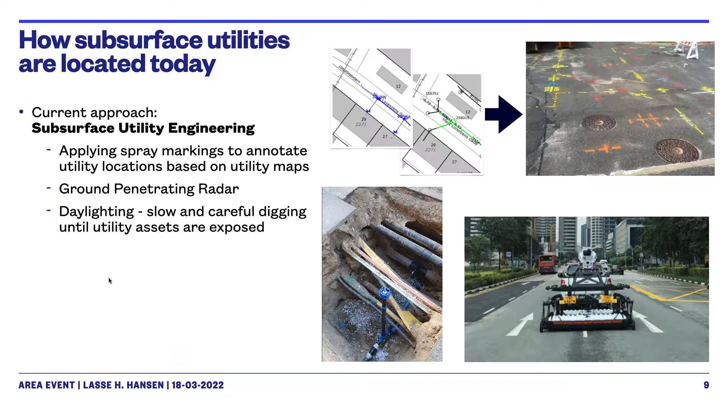So part of the title, Subsurface Utility Engineering, is the surrounding topic of what we're talking about today, because that's actually a profession and a task that engineers have to do in the field. And what is it really? It is how we nowadays locate subsurface utilities. In traditional ways, it's either by looking at utility maps and then applying that on the streets with utility markings, or you take more advanced equipment like ground penetrating radar scans, or if you can't find the utilities, you simply have to do what's called daylighting, so slow and careful digging until the utility assets are exposed to daylight.

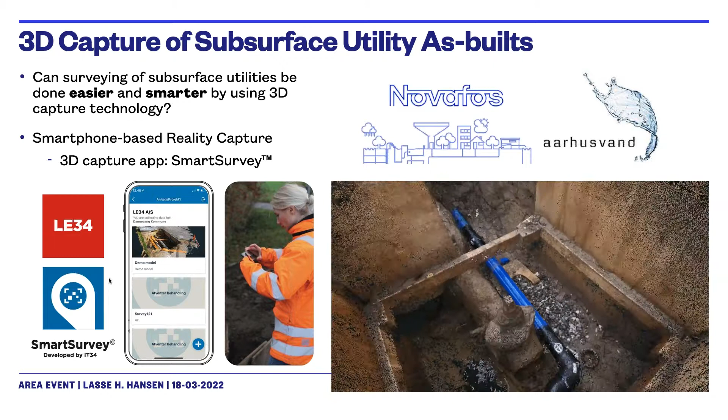And just to give you an idea of what Rasmus was supposed to tell you about, the 3D capture part of subsurface utilities. This is where we asked ourselves, could surveying of subsurface utilities be done easier and smarter by using 3D capture technology? And what LE34 ended up doing was build a smartphone-based reality capture app that uses photogrammetry to make really nice and detailed 3D point clouds of as-built utilities.

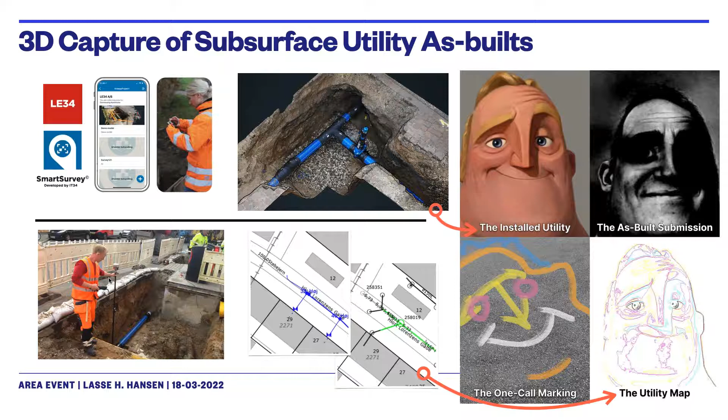So when you compare that to the Mr. Incredible meme again, we could say that the 3D captured as-builts are actually now the installed utilities. They are like an exact 3D representation of him, whereas in the traditional way, what really happens is that this utility installation, and we're living in a 3D world, right, gets compromised into this utility map.

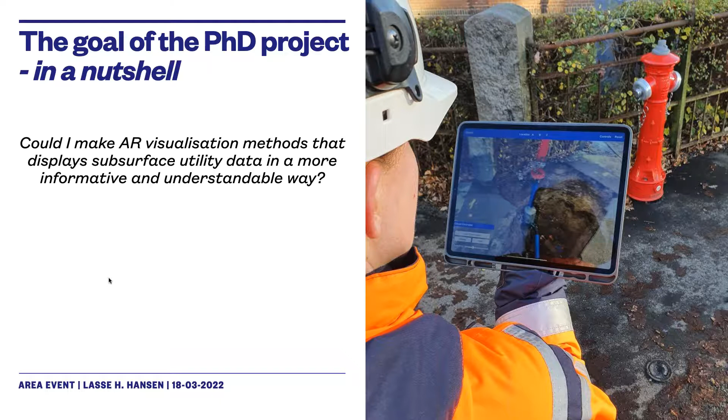Okay, so what I wanted to explore further in my PhD, especially the visualization part, was whether I could make new kinds of visualization methods that could display subsurface utility data in a more informative and understandable way. To understand that, let me introduce some of the challenges with visualizing underground infrastructure.

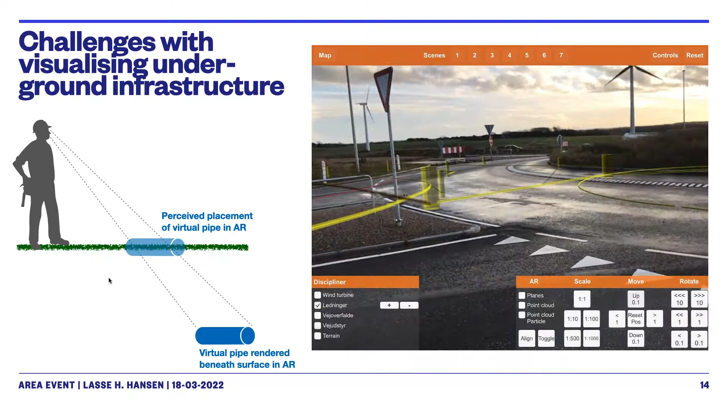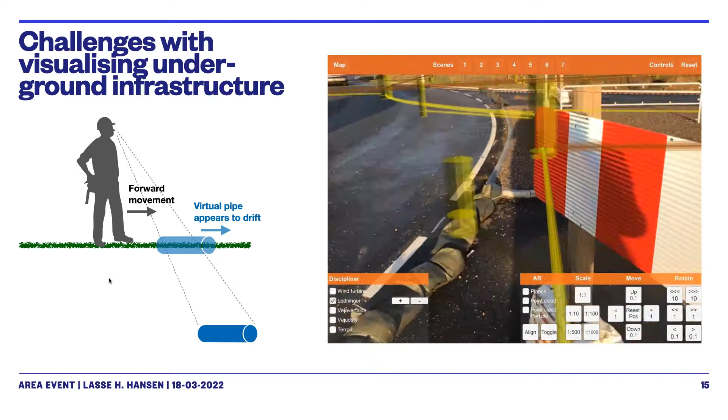One of them is that, as you can see here in the video, if you just naively display subsurface utility data as 3D models beneath the ground, even though these are correctly placed, it doesn't really seem right. It looks like these 3D models are somehow floating above the ground, and it has to do with what's called the parallax effect, when you try to visualize something behind an opaque surface, and this becomes even worse when you're moving, where the parallax effect really becomes present.

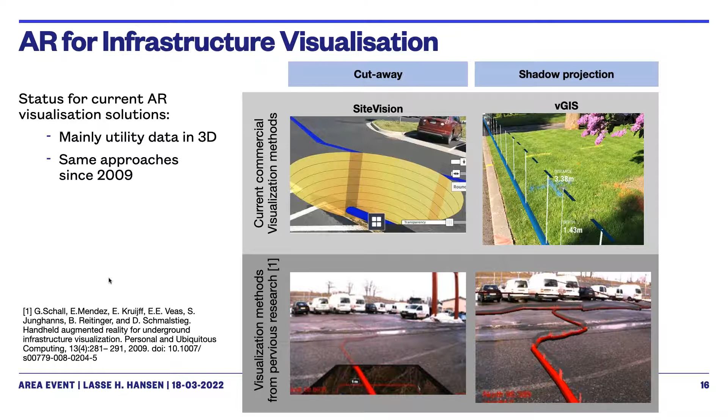But when you look at it really, you can see that these visualization approaches were the same as what has been done back in 2009. So there hasn't really been anything new, I would say. That's at least what I found one of the motivations to try to look into: could we maybe do another kind of AR visualization? And also one of the big problems is that most AR systems today just use a planar ground surface estimation. So a lot of times these techniques don't really follow the actual terrain of the real scene, because they just estimate it as a planar surface.

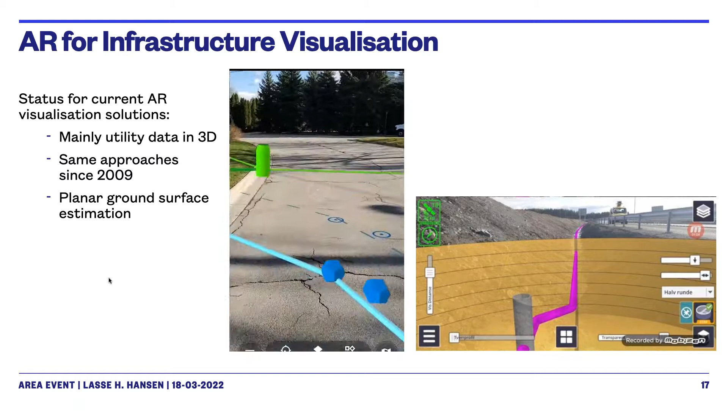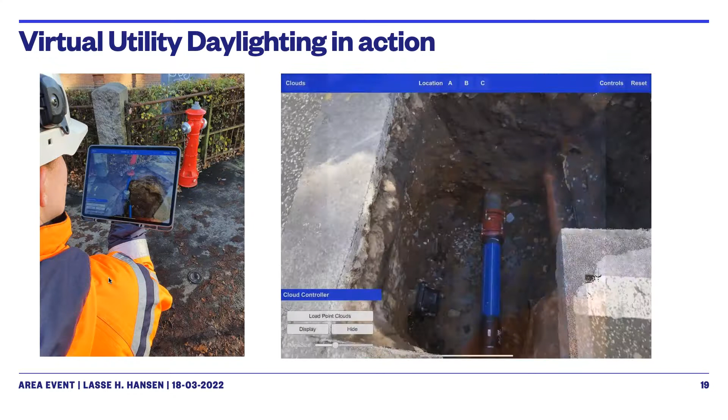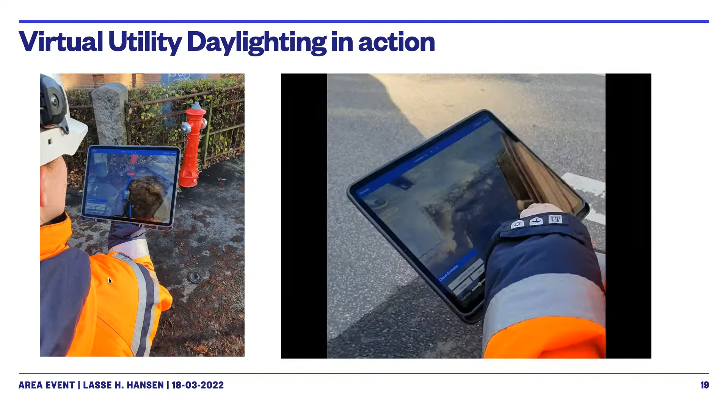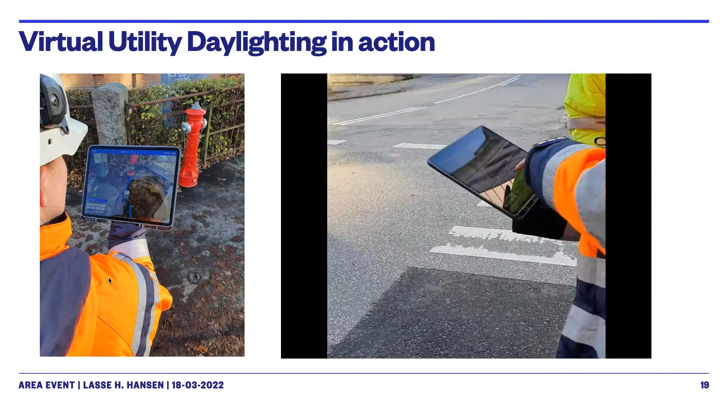So here you can see we place the 3D point cloud on top of the street surface, and it's actually kind of like a time machine, right? So what we look at here is, 6 months ago there was the excavation, but now we can visualize how it looked. And this is just another example of it, but it really provides a believable AR experience. And I would say that this is also due to the fact that we actually have something that was captured in this place, and then we perfectly align it again in the same place. So it kind of fits into the real world, right?

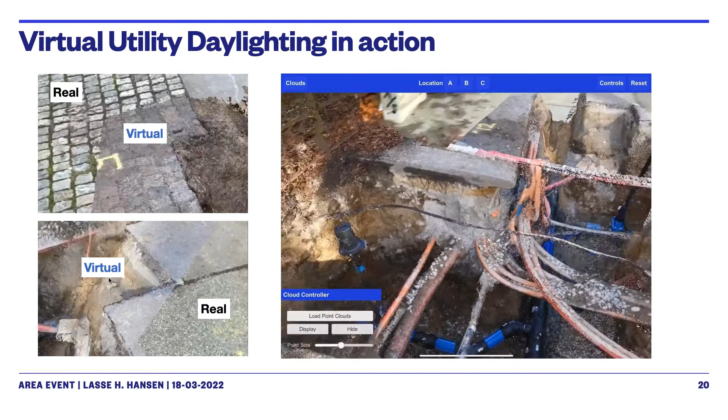And we also interviewed some of the professionals working with this, mostly excavators and utility planners in the field. And they really liked it. Some of the pros were that it provided a clear picture of what is beneath the ground, and the possibility to see the utilities' placements and the depth, and especially depth is very important, because most of the time in utility maps, depth is lacking. The width and material type, all these kinds of things, they could just read from this realistic-looking point cloud, and it basically unlocks the dream of x-ray vision before digging.

The cons, of course, were that you need to capture the point cloud data beforehand, otherwise you can't display anything, right? So that's kind of a big limitation in terms of using this everywhere. And some also mentioned that it could actually provide a false picture scenario. So for instance, if another excavator happens to have been excavating after the 3D capture documentation happened, then what is shown in the AR use case would be a false picture.

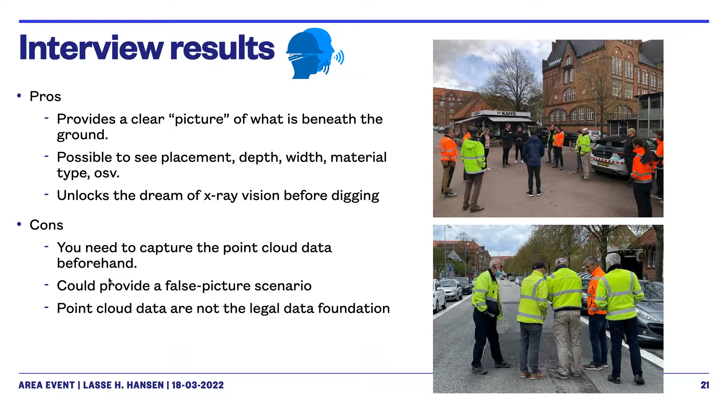So the next step was really that we got this really good feedback from this visualization method, and I thought, could we maybe make a good visualization method for common utility data? And I would say this is really one of my more philosophical moments. And one of them was, of course, that the common utility data is this 2D vector data.

Just gonna take some sip of water.

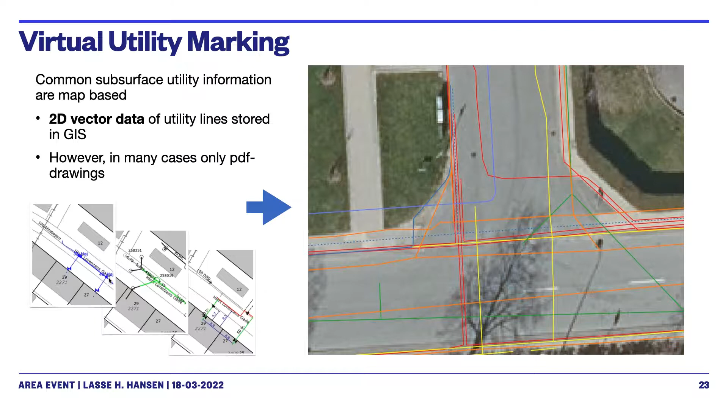But again, the problem is that, as you saw in most of the visualization methods that were demonstrated before in the background, they usually relied on 3D data, right? But a lot of the time you don't have the depth information included in the utility data. So this was one of the limitations I worked with.

And really what came to mind was, could we maybe make an AR visualization method that was more relatable for the subsurface utility workers by resembling the visual appearance of real utility markings? It was playing on the same positive feedback from the other visualization method, where it looked exactly like what they were used to seeing in the field, real excavation holes. So could we make something in augmented reality that looked like real utility markings?

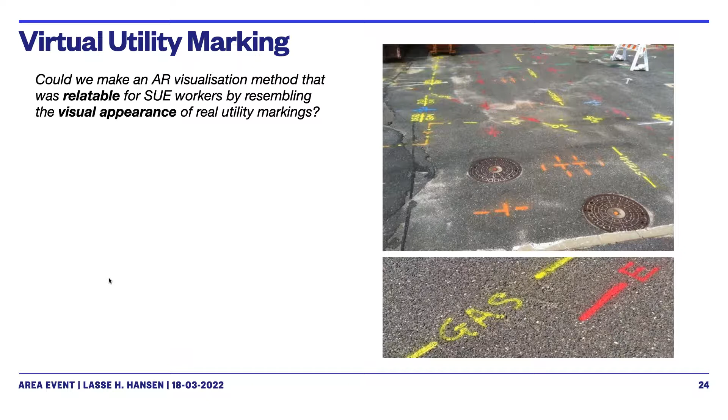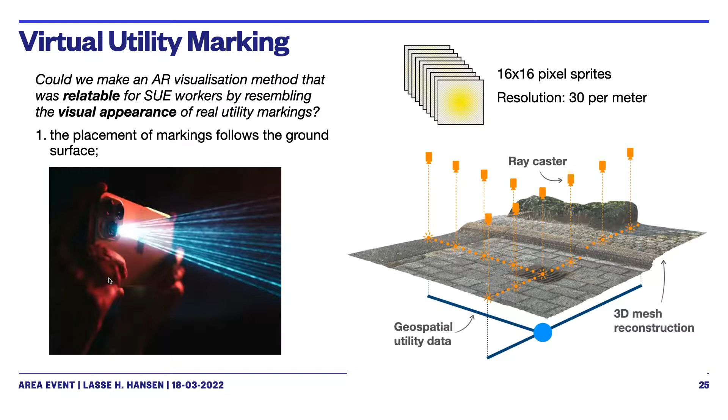So for that we analyzed some criteria. One, the placement of the markings had to follow the ground surface. For that, we relied on the newest iPads with the 3D LiDAR scanner on the rear to get real-time 3D reconstruction of the ground. And through some fancy computer vision methods using raycasting and such, we could have the visualization follow this 3D mesh reconstruction generated directly from the terrain.

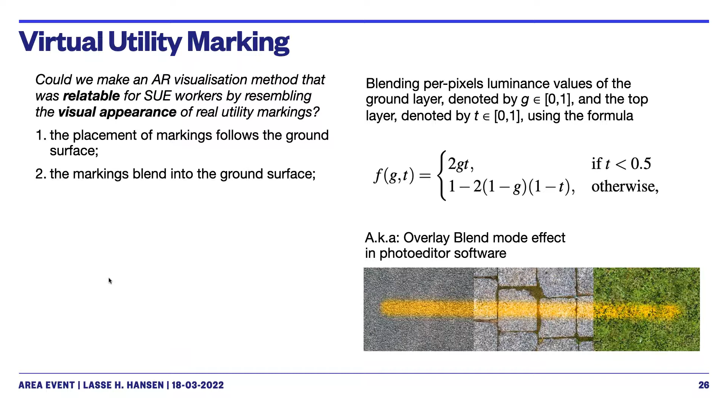The other thing was that we wanted the markings to blend into the ground surface, just as the real utility markings. For that, we looked into how photo editor software like Photoshop did it, and we looked at the overlay blend mode effect, where you take one texture from the background with another overlaying texture and blend them together. So we incorporated that into our shader development.

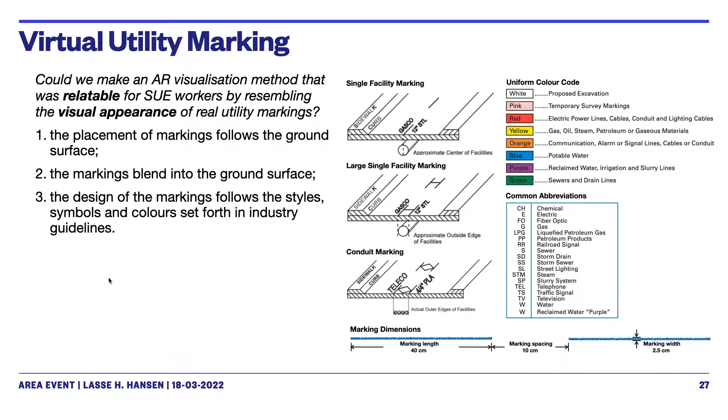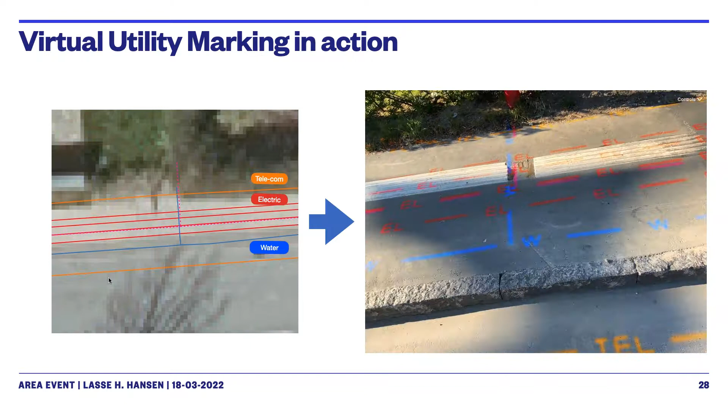We also wanted to follow the same utility marking language, so to speak. So we looked into the standards of some industry guidelines, as seen here. I think these are actually examples from the US. So we followed the same styles, colors and symbols. And this is the result, which I think looks quite good. The input is GIS data, and the output is this virtual utility marking. Let's try to break it down.

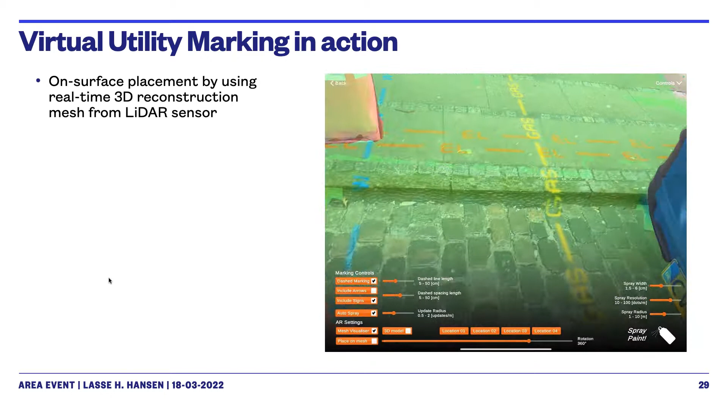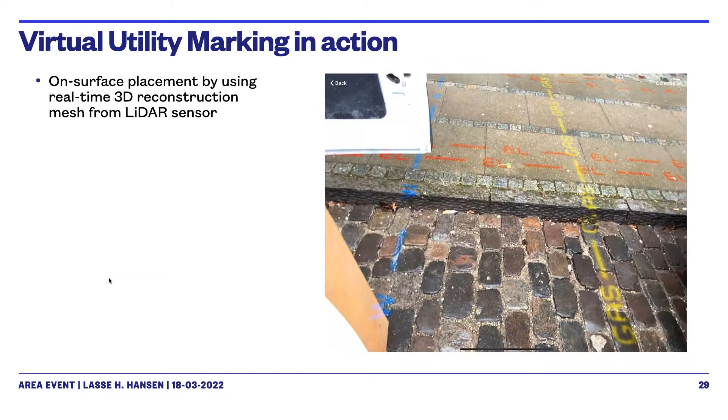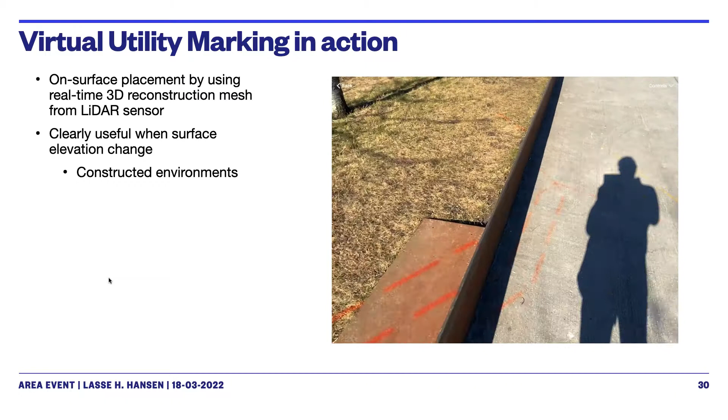You can see here that the LiDAR on the rear of the iPad generated a real-time reconstruction, and by having that terrain in our pipeline, we could have it fit very nicely and closely to the real surface. I think this is clearly useful in constructed environments, because there's a lot of elevation change all the time, especially during excavation. In a construction project, the terrain really changes a lot. And compared to traditional utility markings, one of the main limitations is that once you start to dig and remove the top layer, you also remove the real utility markings.

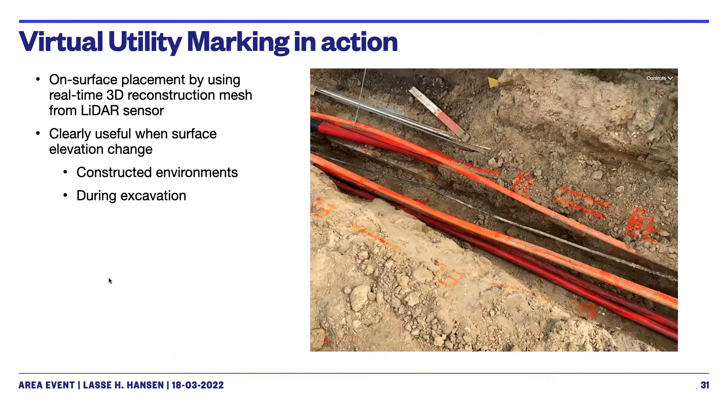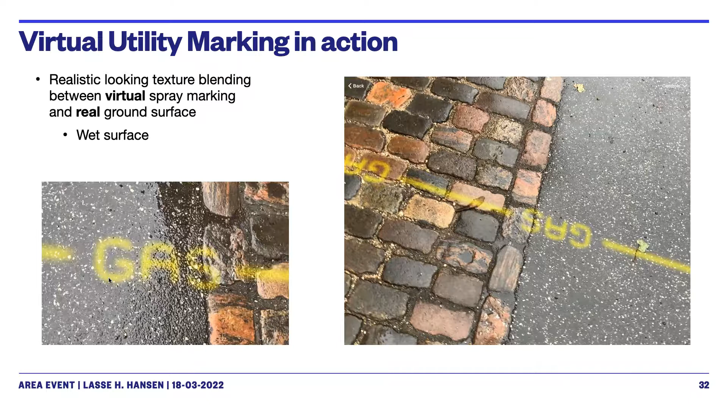This is a more close-up look of how the texture blending looked, which actually came out surprisingly well. We could maybe say that it's just a fancy gimmick, but I would say one of the benefits is that it doesn't really obstruct the real environment. It blends in nicely with the real environment. I think that is maybe one of the key benefits of this approach.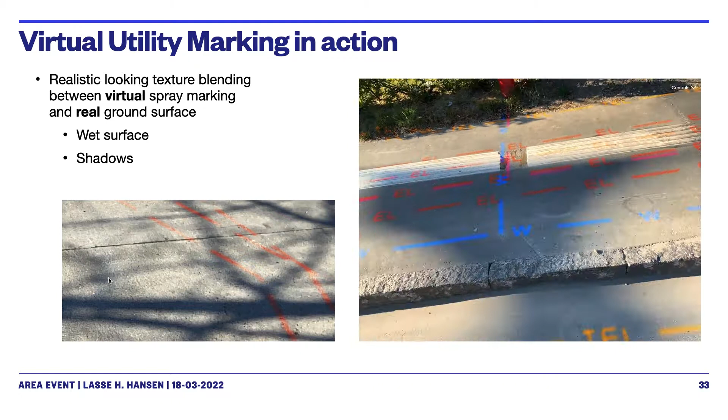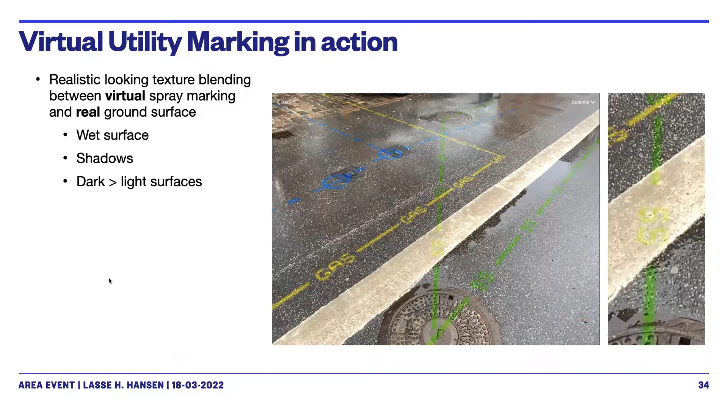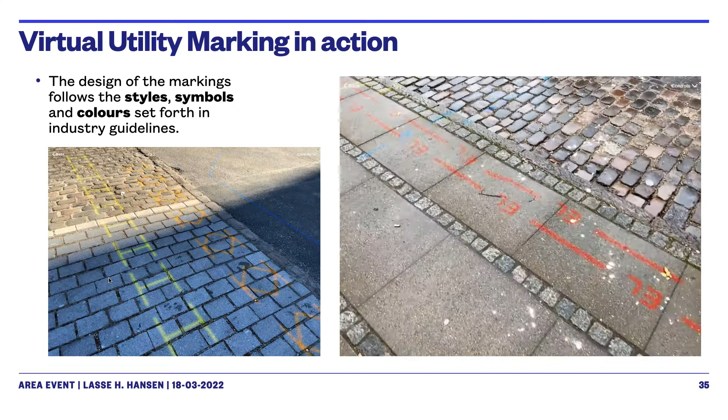But there were also some limitations. For instance, here you can see on white surfaces with a rather light green color, the blending wasn't as clear as we would have liked. And then also some examples of the design of the markings, styles and symbols. As you can see, we incorporated that, for instance, for electrical cables we had the right abbreviations and such. So all in all, this was very comprehensible looking.

The respondents said in the interviews that they felt this was directly relevant to their use when working in the field. One of the clear benefits was that they really liked the stable visualization, closely aligned to the ground, so no floating-in-the-air effects. Cons: there was the lack of visualizing depth information, but we didn't have the depth information, so it's hard to visualize it. Anyway, this was some of the respondents' responses.

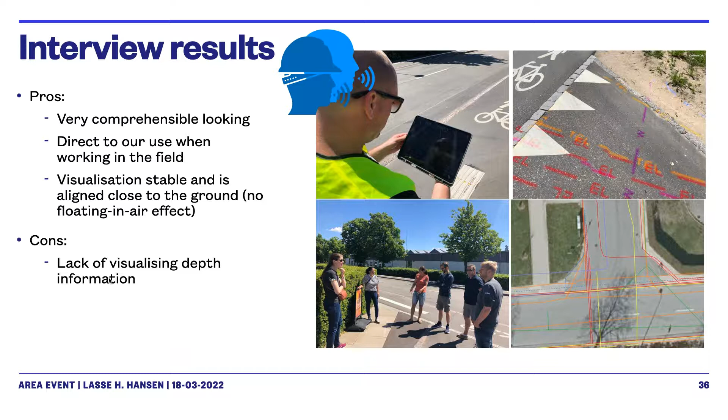All of this work has mostly been done together with Aalborg University, where I'm part of, and also Graz University of Technology, where I work with some amazing researchers.

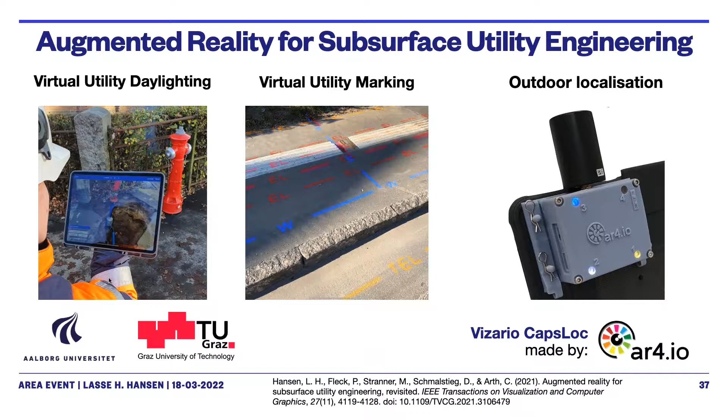And one thing that I haven't really talked much about, which I won't go into depth with, is solving the problem of outdoor localization. And for that especially, the guys from TU Graz and ar4.io, in our prototype setup, we incorporated this sensor cube that could provide us with accurate outdoor positioning. So if you want to know more about this, I think you should reach out to Clemens Arth here. He would definitely tell you more about how this device helped us achieve good centimeter-accuracy outdoor positioning.

So yeah, the conclusion was that in terms of the 3D capturing, that part is way better than conventional surveying, in that it's quite easy to do 3D capturing now, and there are so many benefits from it compared to just using conventional surveying. And one of the clear benefits was actually to use these 3D point clouds, or 3D captured models in general, in augmented reality, as shown here with the virtual daylighting approach.

And what I would say is that even though we always see 3D point clouds as something that doesn't have any structured data, doesn't have any semantics and metadata attached, when really visualized in augmented reality in this use case and seen by the eyes of the professionals, they can generally retrieve a lot of information, which I was surprised by, simply because this is almost an exact 3D picture of how the utilities were installed.

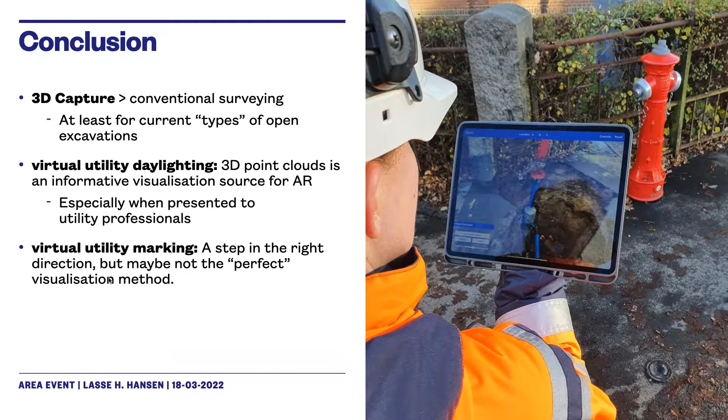And for the virtual utility markings, I would say it's a step in the right direction, but it's maybe not the perfect visualization method. But it is at least, I think, a visualization method that is trying to be designed for the actual utility workers in the field, and plays on the strengths of how they want to perceive and obtain utility information. So I think it's a step in the right direction.

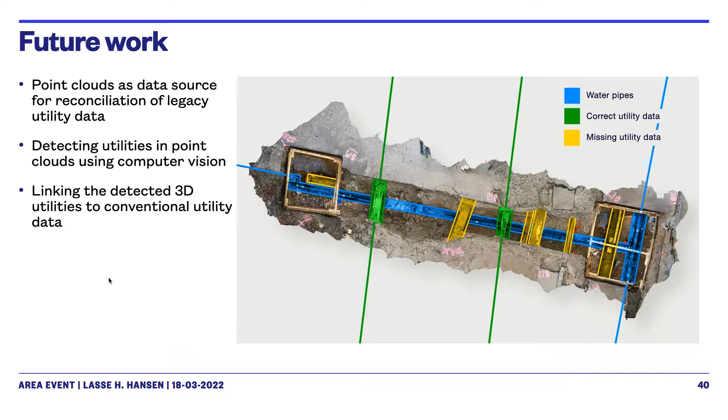Yeah, and for future work, I would say that this is all good, that I made this AR visualization method, but really the problem a lot of times is that the existing utility data we have is not accurate enough. But what is accurate is these 3D as-built captures. So the idea is, could we take these 3D point clouds, understand them better and use them as a kind of validation source for the existing utility data, and maybe also generally upgrade the existing utility data based on these scanned excavation holes.

And I think one benefit, going back to augmented reality again, could also be to establish a more semantic link to accurate traditional GIS utility data, which has a lot of valuable attributes, and then maybe display that in a combined AR visualization prototype, like shown here on this concept figure.

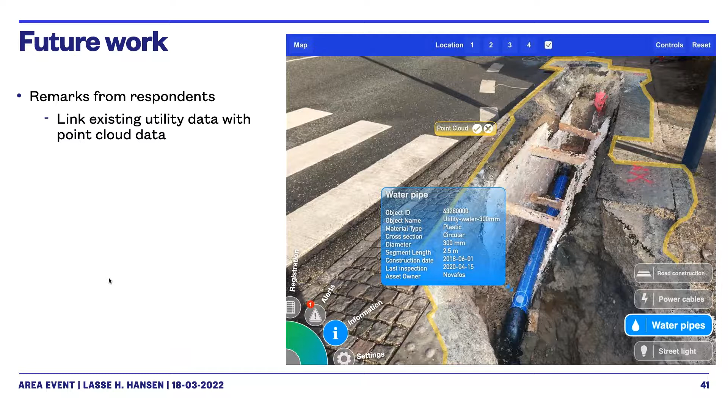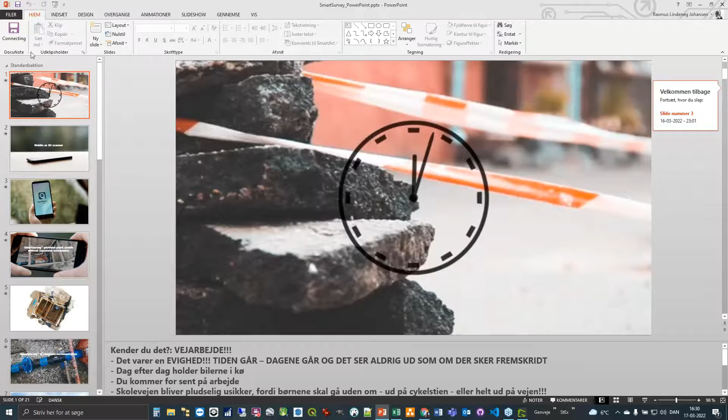Yeah, so thank you for this. And I can see now Rasmus is here, so I will just give the presentation to Rasmus, and he will make presenter. Here you go. And I unmute myself. Yes, I can hear you loud and clear, Rasmus. So let's see which screen I'm sharing. Do you see my screen? Yeah. The one with the PowerPoint on? Yes. Perfect, Rasmus. Thank you. All right. So now a little clock should be rotating. Time goes by.

Let me apologize. I was in the office, but I didn't feel well, so I had to drive home. So I hope it was okay that I take the last part of this. Stop me if I say something that you've already said, Lasse.

Otherwise, I will just continue, and I will focus on the actual data capture and also the functionalities and what we've done in order to set up a system where we can achieve a fairly quick data capture of consistent and usable geodata. So the first one here, the clock that runs and runs, illustrates one of the reasons why we dived into this issue.

Maybe Lasse touched on this, but in effect, we as private citizens see a lot of these digs all around the city all the time. And sometimes it's annoying, and sometimes you drive beside one of these excavations and you think, what is going on? Why didn't they just close that hole so I can go about my normal business?

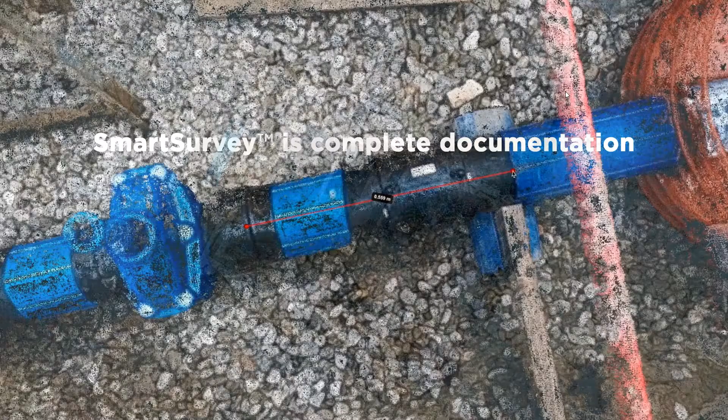Let me see here, the next one. So in effect, this SmartSurvey is a complete documentation through a 30, 35, 40 second video, because we calculate the point cloud, but the video itself is just a lot of images. It's often 30 frames per second, which means we have 30 images for every second recorded. It's quite sufficient to take maybe 4, 5, 6 from every second to do this calculation, but that also means we have still images from all of these locations, which we can use for inspection at a later stage.

One of the issues that it solves is that in many situations, when the surveyor or the contractor digs the hole and installs the pipelines, he also takes a few images, maybe 10, 15. But often they end up on the iCloud or the gallery of the phone they were taken with, and they don't make it back to the document handling system. So they can be lost. So we record a video, we make sure that it's georeferenced through control points, we implement the scale bars to make it relatively very accurate, and we secure it for documentation.

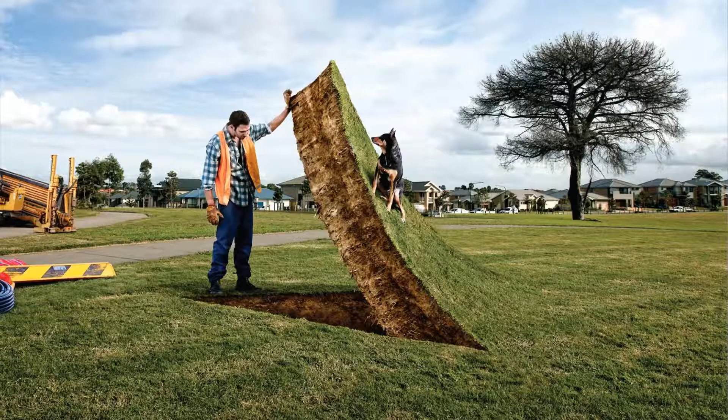As you all know, as soon as the work is done and the hole is filled up, then the pavement is put over it and we can't see what's beneath. Lasse has made a very, very good way of either looking beneath the ground or kind of projecting the underground onto the surface of the ground, kind of making the data visible again.

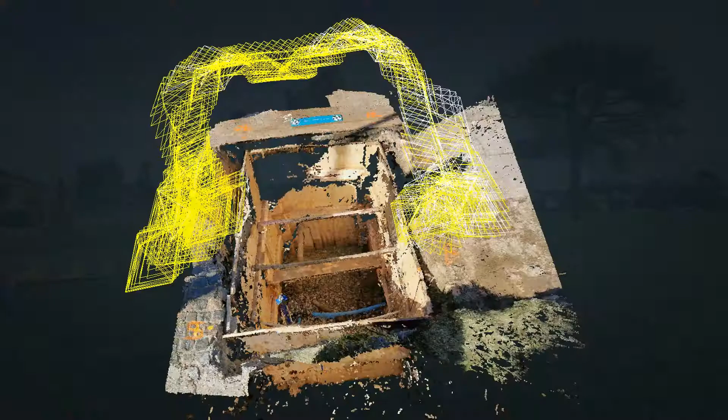So what I wanted to show now was that, as I said before, the yellow markings here actually indicate where the video recording has been done. So for every one of these yellow markings is an image showing the inside of this trench. And you can see the scale bar in the background. Just to illustrate that it is actually accurate, it's 50 centimeters between the 2 points. And when we do a measurement, it is 50 centimeters between these 2 points. That means that every measurement inside the point cloud is actually very accurate distance-wise.

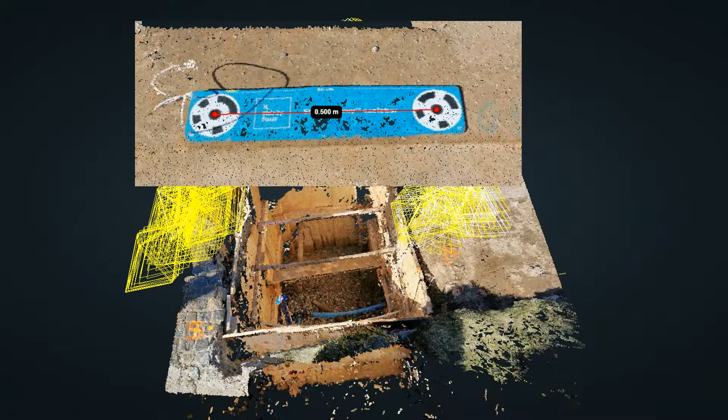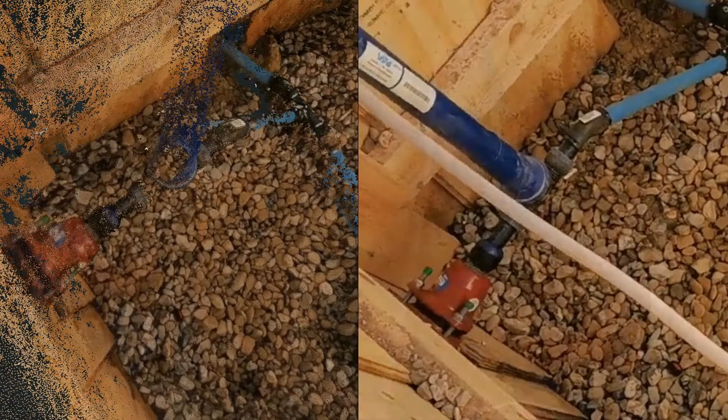When we put the point cloud and the image beside each other, you can see that from a distance it looks quite similar. But when we want to zoom into the details, the point cloud itself becomes more scattered. And that's just the nature of the point cloud. It's a very good tool to do distance measurements or area measurements or take coordinates. But the image itself contains a lot more information. So by putting these two next to each other, we get a very good data set for doing the measurements, and a very good data set for doing the inspection.

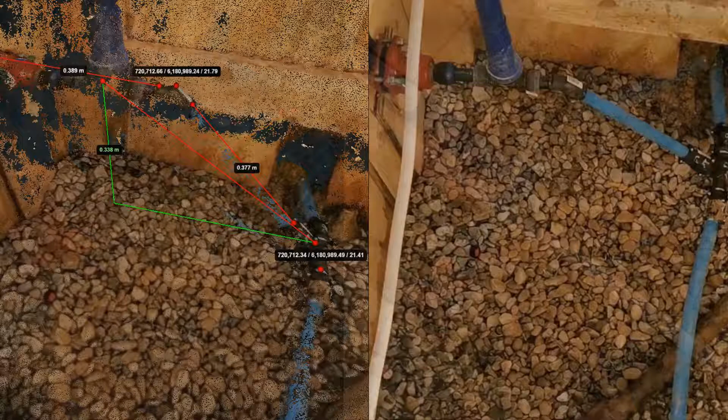The measurements can be done in the point cloud, so we can have clear and accurate measurements between points of interest. It could be the pipeline itself and the height difference between the two water pipes. And we can also start to take coordinates. This means that whatever was not measured while the trench was open, as long as we have this 30 seconds video and the control points, afterwards we can do all the measurements, all the documentation and all the feature capture that we want. The trench does not need to be open.

And why is this important? It is important because in reality, we know a lot about where our pipes are. And Lasse, you probably touched on this also, but let me just quickly run through some of it. This is an extract from the Danish pipeline database. The green and the blue ones are the ones which are known, but there's actually a lot of data missing from this database. And when you dig a trench, you will meet these pipes nonetheless, even though you don't know that they exist.

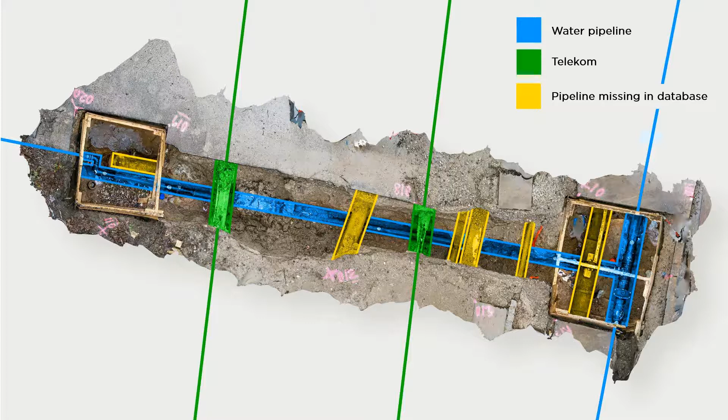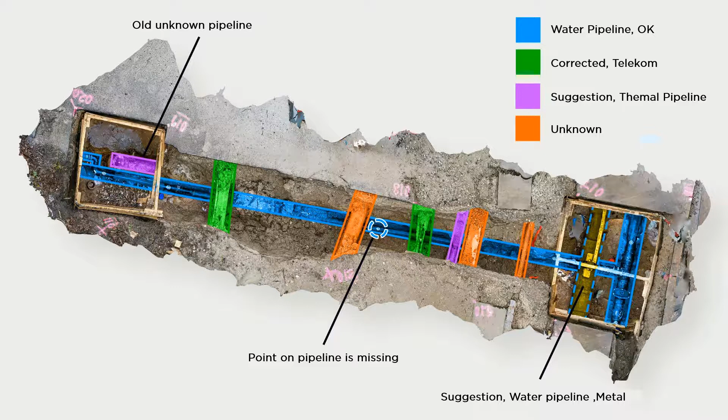There are also a lot of other issues with this data set that we don't know anything about. But as soon as we have a point cloud and this data, we can start to elaborate and do more registration. In effect, if anybody wants to revisit this trench, instead of just extracting the line features from the national database, they could also look at the point cloud and see that there is actually something else they need to be aware of, so they don't dig and rip these pipes along. As I said, we can do all the feature capture that we want afterwards: coordinates, heights, distances, areas, whatever.

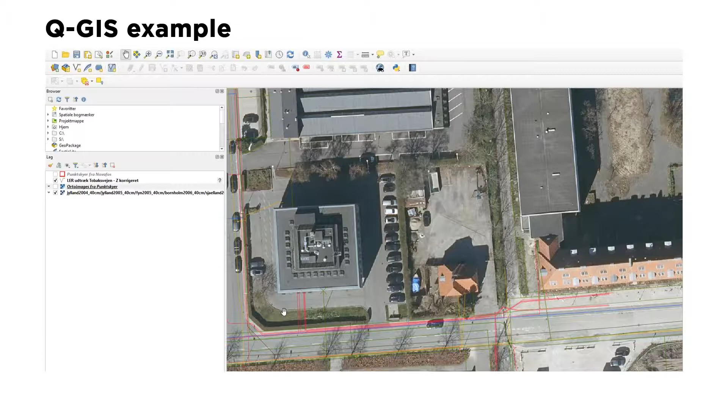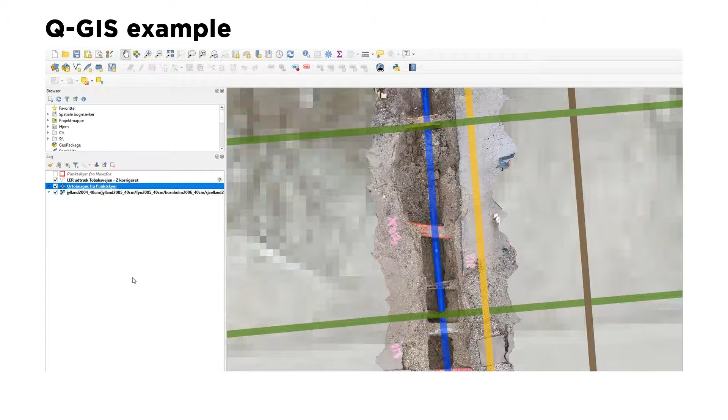And of course, the data is integratable in the GIS platform. So whenever you have a QGIS, the data can be streamed through WFS as a line string for the pipelines, or we can use a simple orthophoto calculated during the point cloud calculation, which is streamed in as a WMS layer in the GIS. So now you get a visible setup where you can see, together with your current registration, also new pipelines or pipelines you did not know exist.

Of course, I represent the LE34 company, and we've also made our own 3D web viewer for this, where we can take the lines into 3D, integrate them with the point cloud, and see how things look in reality.

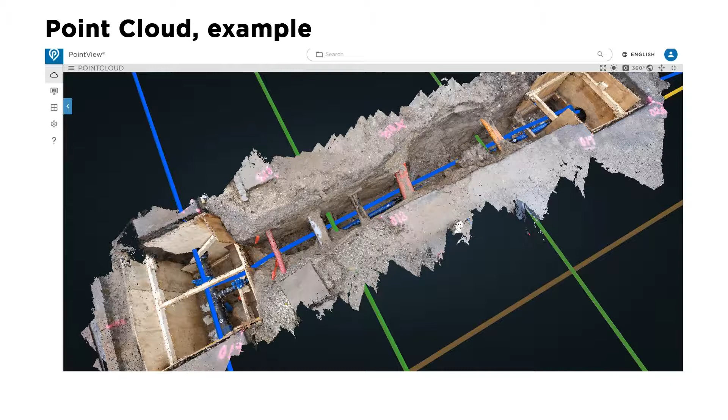And to finish it all off, it's actually quite easy. It's called Smart Survey because it is smart and it's a survey. And all you do is just install the app, and from there you're good to go. Of course, adding the tie points, adding the GPS control points, you just increase the reliability of your data. But from the very first recording, you have a very good documentation of the initial dig itself.

So that was the very quick introduction of what I had to say about the way that we have set up a production and a data capture for documenting trench digs and making it available on a fairly large scale.

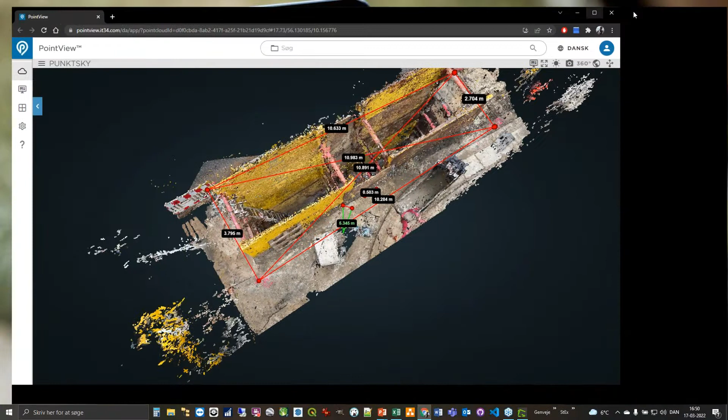Yeah, thank you. There's probably another question. Oh, sorry, my screen here. I'm probably still sharing my screen, right? Yep. Yes.

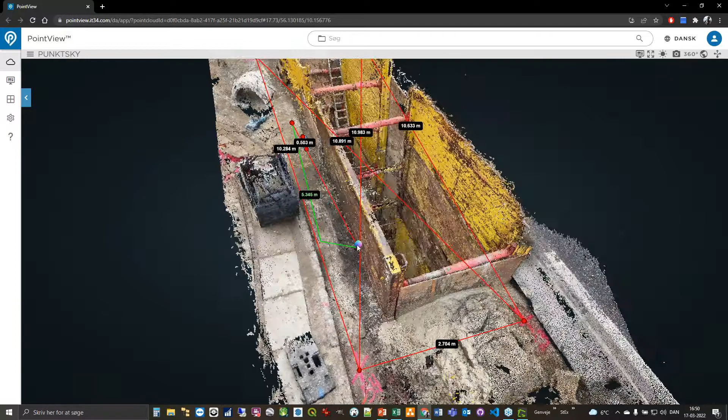So you see now the live point cloud. This is actually from a recording I did this morning for a contractor. He's doing a pipe dig inside the trench here. So just to bring in a practical one, I've put a marking here on each side of this one, and then the scale bar here in the middle, right here. And this is done just from capturing the video from an iPhone 13 Pro, walking one trip around the excavation.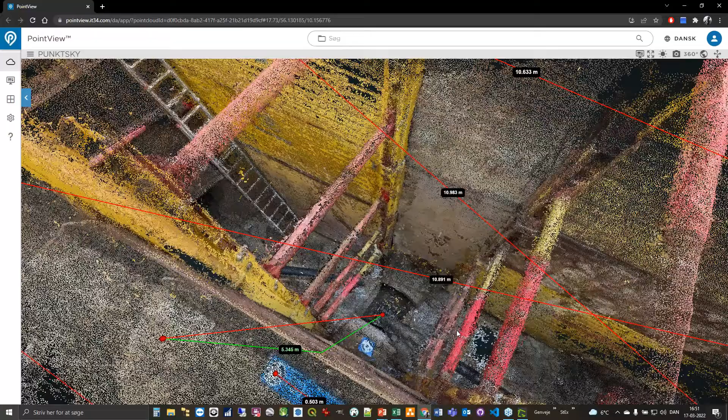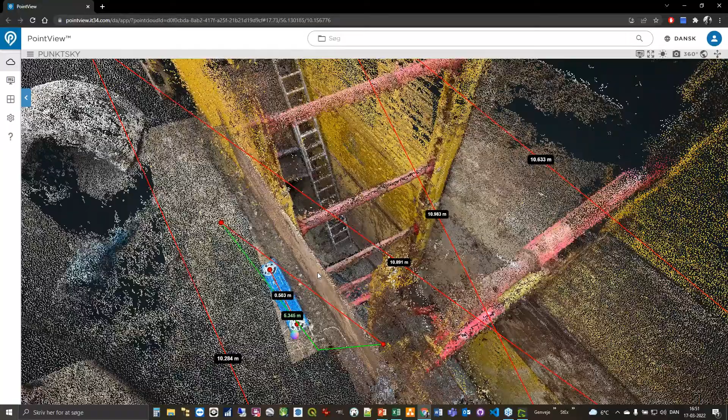And if I dig down here, we've included a tie point here down very deep in the trench to make sure that the noise is not that much. We still have some noise in the point cloud, but this is the actual point cloud just calculated from this one. It's deep inside the ground. It's about 5 meters down below, like this. So it's just to show you that it's not just these small 1.5 meter deep digs that it can actually solve the issues.

Sorry. Yeah. Excellent. You had a question. There's a couple of other questions coming in, so let me ask you those as well. I'm just watching the time as well.

Do the markings work when there's obstacles in the way, like cars on the road? I guess is that for the augmented reality markings? I guess so. Probably. Yeah. Well, if there is a car that's stationary, the markings will just follow the curvature of the car. The input is the real-time 3D reconstruction using the rear lidar from the newest iPads and the newest iPhones. So whatever it picks up, it would be visualized on top of that surface.

Okay, that makes sense. Another quick question. How long has this been used in the field, and how many scans have been collected? We've been using this and developed it during the past 3.5 years. And together with a couple of companies in Denmark and Sweden, I think we have around maybe 4,000 different individual utility excavations like this. Some are very narrow, just for water utility maintenance, and some are trenches ranging up to 75 meters long in each section.